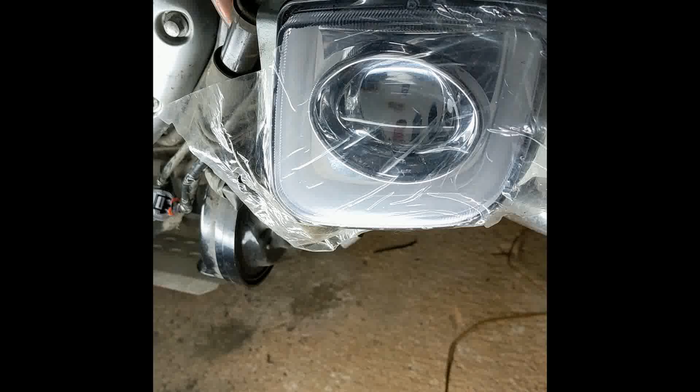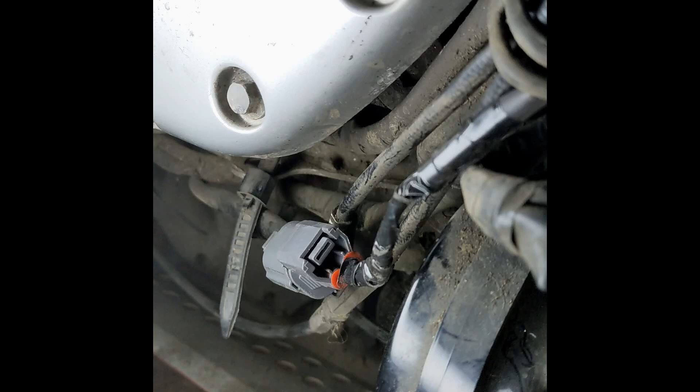So I've just installed these Chinese fog lights on my GL1800. They plug in here, and although this is a UK spec bike, it still has the fog light connectors down underneath the front of the engine. So that was fairly straightforward, that bit.

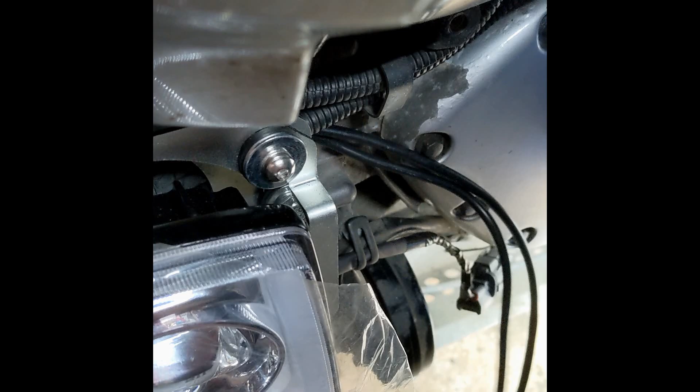Here's the other side. I've yet to pull through the running lights and indicator wires. By the way, if you're installing these on a UK spec bike, you'll have to create a separate feed for the running lights, because the American spec has a twin filament bulb in the indicators which show as position lights and indicators. The UK spec does not have that, so you have to find your own feed for that.

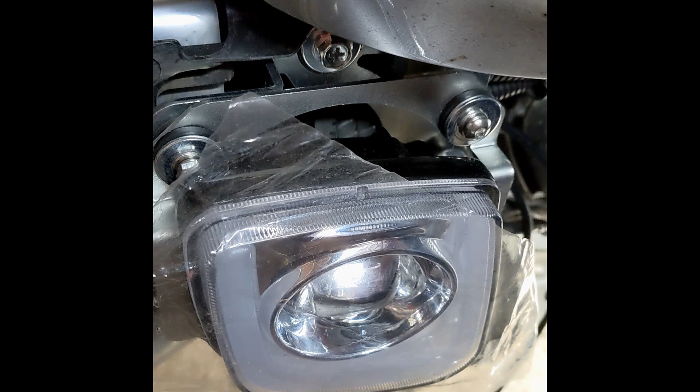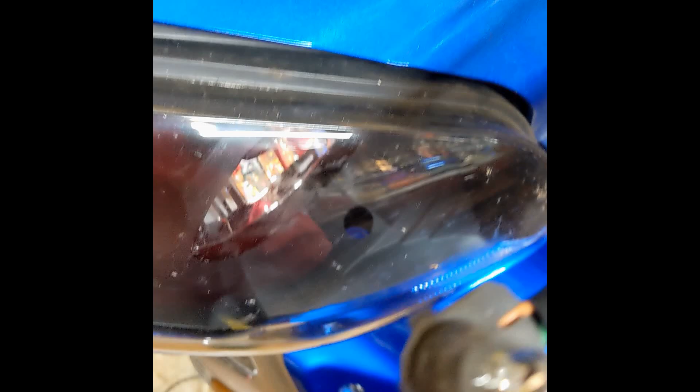I've tapped into the pilot lights inside the headlights, or side lights, whatever you like to call them, so hopefully that works. I'll show you the connection in a minute. So here is the mini loom which supplies the front side lights or pilot lights or marker lights, whatever you like to call them. You can see that they've come out. Now this is a UK spec bike, and it has to have those lights, although they don't really do much, because when you're riding the lights are on all the time, the headlights are on.

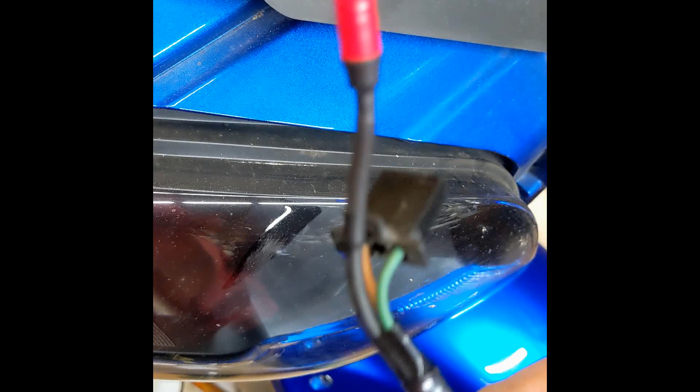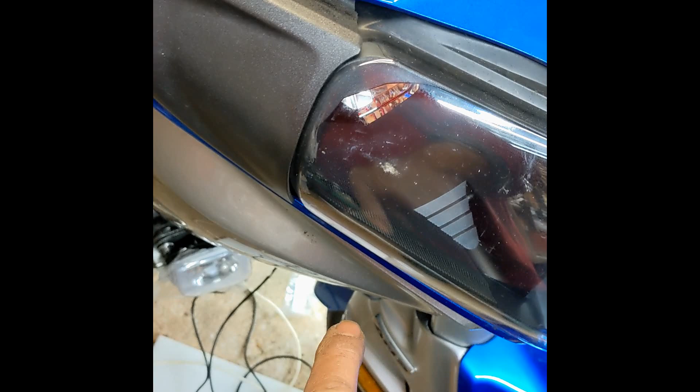But what I've done is I've put in a connector, just tap that into the feed. Just a note to say that the ground connection is done through the main wiring loom for the fog light, so you don't need to worry. Just the one positive feed, that's all you need.

Now here's the new switch. There is a blanking plate which has to be removed, and you have to take the back off of the control panel. This is the audio and radio control panel on the left, and the fog light switch just sits in there in the bottom. It looks okay. The switch could possibly be more positive. Certainly the hazard warning switch's spring is a lot stronger, but we'll see how it lasts.

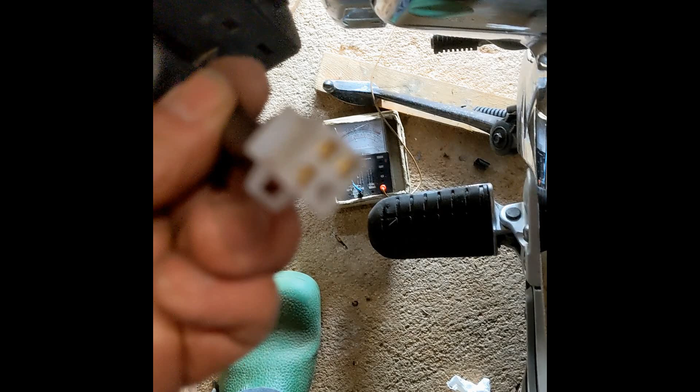It'll probably burn out within the first few weeks, probably, to my irritation, but never mind. So this is the connector from the switch coming out of the back of the panel, as I've just shown you. This is the 3-pin connector which the switch connects to.

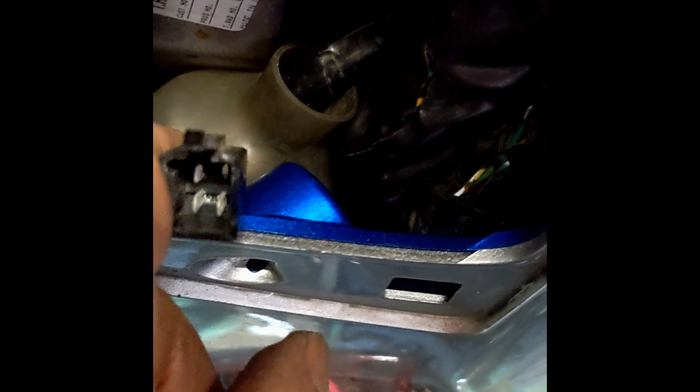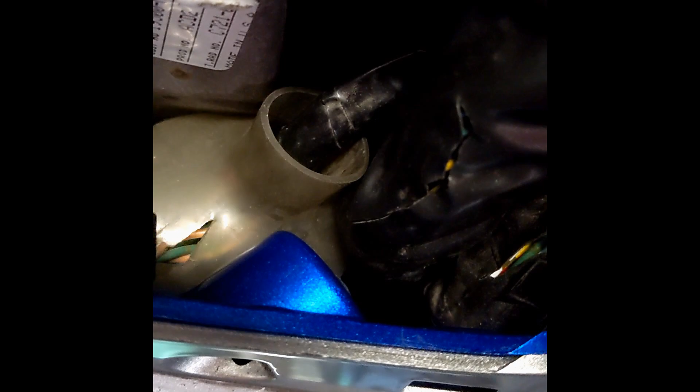Now it took me about 3 hours to find this. It was hidden away inside this transparent boot here, which is just behind the left-hand radiator, down really low inside the fairing. It's about where your knee is. Took me a while to find it. I did it by tracing the wire, because it's a brown wire with a blue stripe which goes to the fog lights. So anyway, it's here. You just see it.

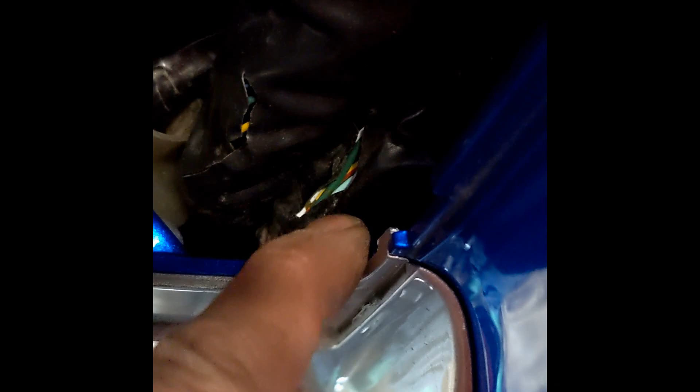So anyway, I'm pleased with that so far. I just need to put everything back together and connect it up, and hopefully it will all work. Now, I didn't like to do it, but there was no way you could get the connector out through the top of the boot, so I did have to slice it to get it through. It's a very short wire as well. Doesn't look good. I also did slice some other parts of the wiring loom cover just to see if I could trace the cable, but anyway, I did.

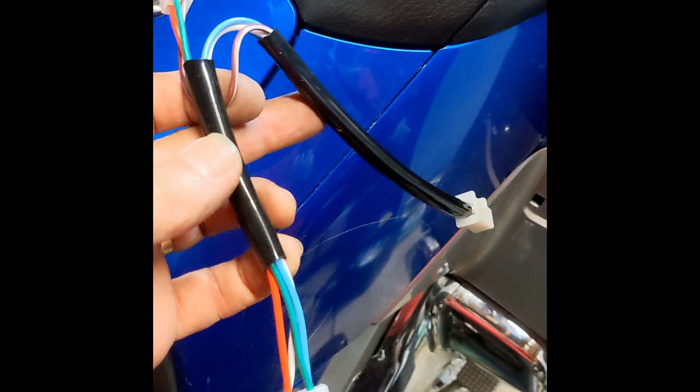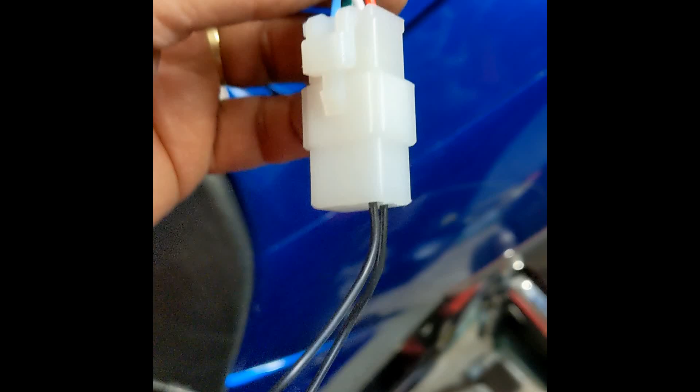I found it. Now the kit does include some various other electrical connections. This is part of the loom that goes underneath the switch. I'm not sure if I'll need it, because it's really intended for a relay. If you can see this loop here, that's just a bypass, but if you take that out, they do supply a relay which goes in there, which is supposed to deactivate the fog lights when you switch on your headlight, your main beam headlight.

Now, because the UK spec connections don't include a headlight feed wire, which I think is the blue one - might be wrong - it's worthless, totally worthless. But if you live in the States and you live in a state where you can't have the fog lights on at the same time as the main beam headlights, then it is quite useful. You just plug it in. It sits between the switch and the bike loom. So there you are.

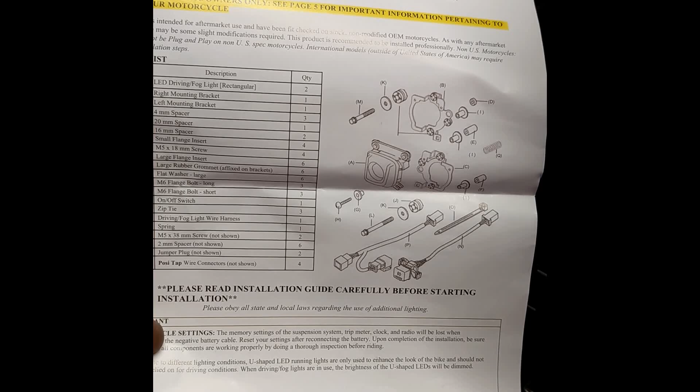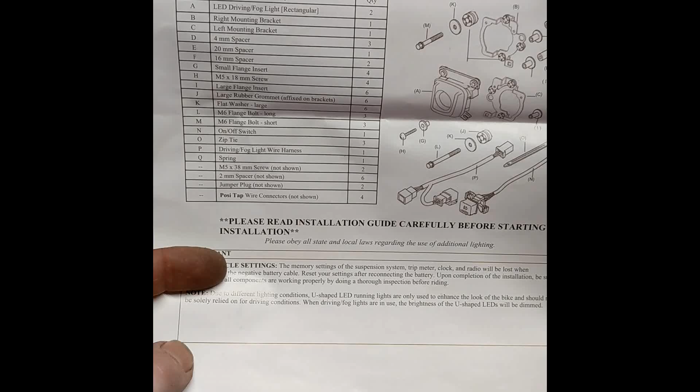So to summarise, really, it's quite a difficult job. It's taking me over 3 days - obviously not 3 whole days, but it's taken me a few hours to solder up all the connections, make the new feeds for the position lights. Quite a task, really. These are the instructions

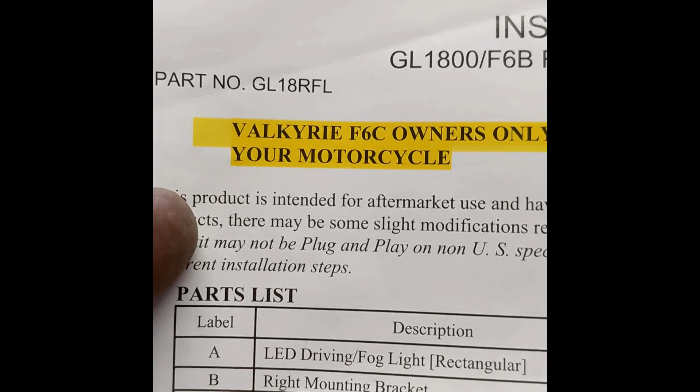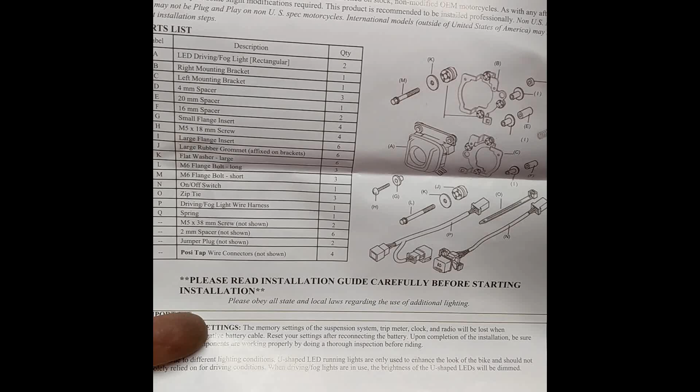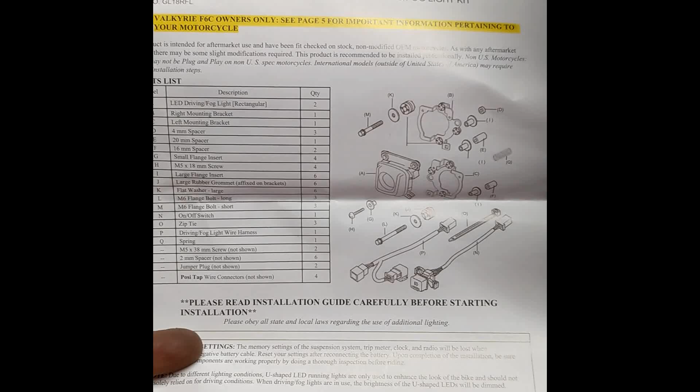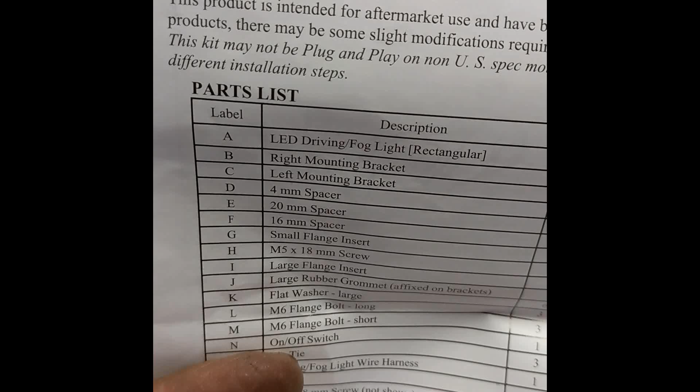for the GL18RFL fog light kit. What can I say? Instructions are fairly useless, really. The mechanical instructions of actually fitting the lights was fairly clear, but the electrical instructions were hopeless. I would say possibly don't expect any help from the instructions if you've got a UK spec bike. To be fair, there is a get out clause. It does say that if your bike's not a US spec motorcycle, the wiring might be different. So there you are, no surprise there.

Still, good luck. If you do try it, let me know how you get on.